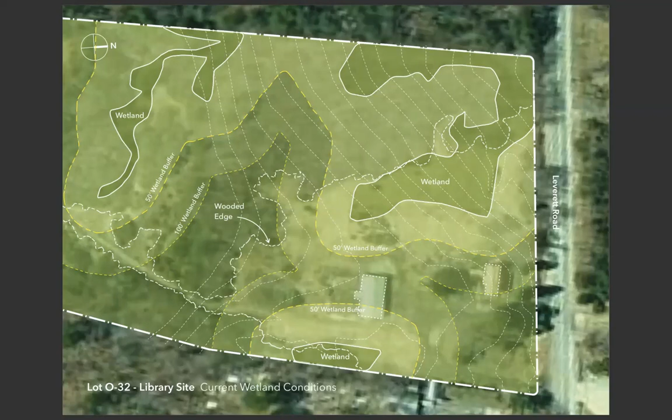What this leads us to is the expectation that really the best area for development of the new library is in this spot that's between the 100-foot buffers, certainly well out of the 50-foot buffers, with access then from Leverett Road coming in through here, which is roughly where the current entry from the driveway is now, off Leverett, and then coming straight back, threading between the 50-foot wetland buffers back to the building and parking.

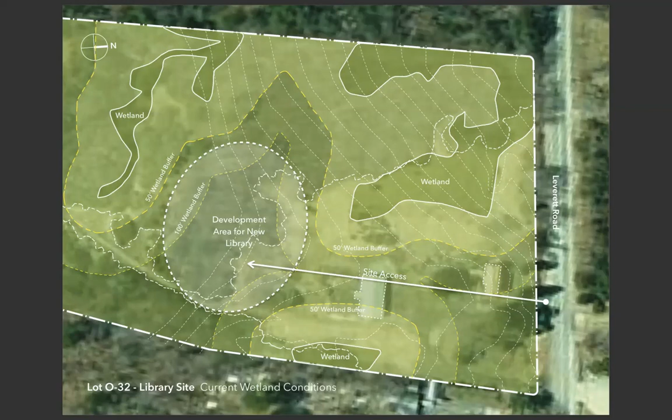Directly relevant, I think, to this project are two recent projects that we've done that I just wanted to talk a little bit about. This is a recent project completed in 2021 in the town of Norwell. Norwell as a town is about 50% wetlands. This is a much bigger building. It's a public library, 20,000 square feet on a single level, completely surrounded by wetlands.

A lot of the same ideas about stormwater management, how we deal with runoff, both from parking and driveway, but also from the building, were things that we really had to work hard at to figure out how to solve in a context like this where it's surrounded by wetlands. And that will be true of this project as well. And so really this is to say that we have that experience. This was a very successful project and a real collaboration with the local ConCom. It turned out quite nicely.

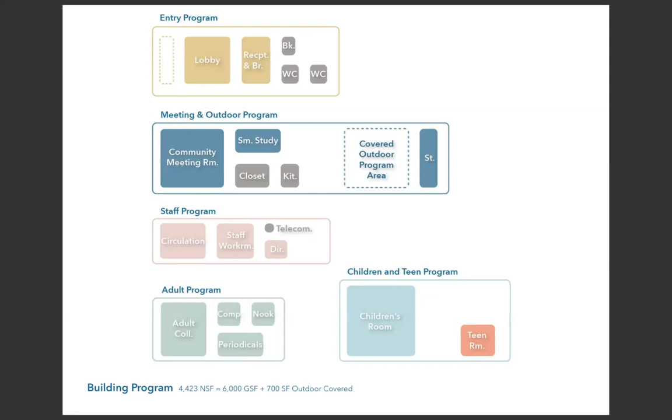So to talk about your project, this is a graphic summary of the building program. I know it's difficult to read these titles, but at the start of a project, it's helpful for us to take a written program and translate that into a visual diagram so that we can use that to start moving pieces around on paper and thinking about adjacencies between certain groups of programming. We've grouped this into entry program, lobby, reception, community meeting room, a study room, spaces that support the meeting room, outdoor covered space, staff spaces, adult program, and children and teen program. And then we use that to start to develop some building planning diagrams.

So we'll have septic, we'll have well water. This will have to be a fully sprinklered building just by code. And so we'll also have to have underground water storage tanks to provide enough water capacity for the fire protection system.

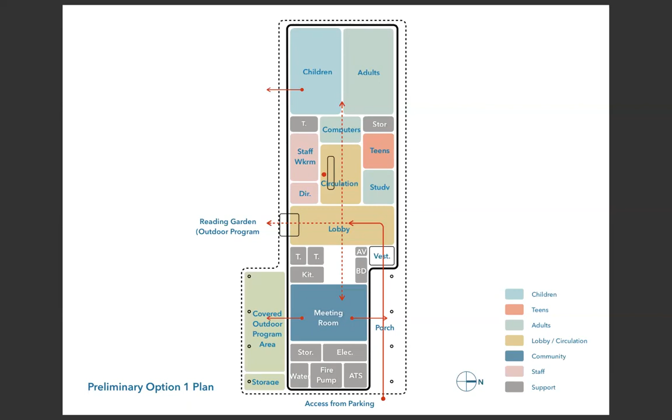So this now is a diagram of the floor plan. The graphic program that you saw earlier, we've sort of rearranged those pieces into a plan that organizes it into a fairly simple bar building with a covered porch at the entrance. And I'll just get right into the plan.

But before I do, one of the things that we looked at in all of these buildings is the roof. We were thinking initially gable roof versus single slope roof, and we realized pretty quickly that the single slope roof offers a number of advantages. Number one, you can see here that only half of a gable roof that's facing south has roof area available for solar, whereas with a single slope roof, 100% of that roof area is available for solar, which translates to about a 33% increase in area. It's not double the area of this side of the roof, but you can cover 100% of that roof with solar. So for that reason, we think there's a real advantage to having the entire roof oriented south.

Another benefit is that when we think about rainwater with a gable roof, we're sending half of that rainwater to one side of the building and half to the other side. If you remember the orientation of the building, half of that rainwater is going into the wetland, half of it is going behind the library. If we do the single pitch roof, like you saw in those previous two examples I showed you, we can collect 100% of the roof runoff away from the wetland buffers in an area where it's easier to treat and send back out into the site.

So in terms of building planning, I know it may be a little bit difficult for some of you to read the labels, so I'll try to walk you through this. From parking, you come in underneath a covered exterior porch, which is along this lower right-hand side, into a vestibule and lobby. If you continue straight, there's the circulation desk, computers, and that's flanked by staff space on the left, director's office, staff workroom, storage, and then library user space on the right, a study room, teen room, and a restroom that is for family, but also staff. Adult and children collection areas are at the end of the building.

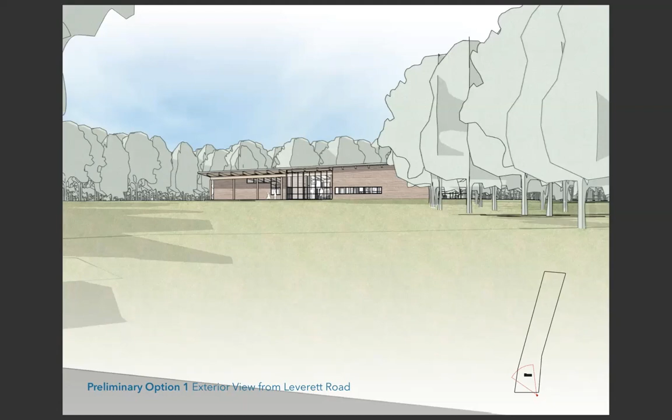This is a view then from Leverett Road, which you can see here, looking towards the front porch. This is the entry vestibule and lobby. The adult and children collection rooms are down at the far end. Meeting room is at this end. You can't see it from this view, but there would be direct access to the back to a covered outdoor program space on the back side.

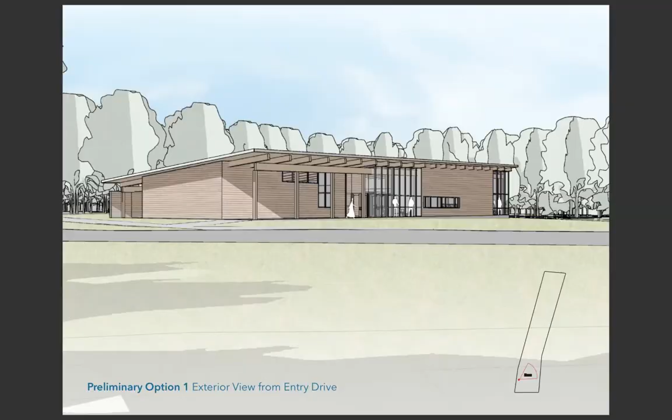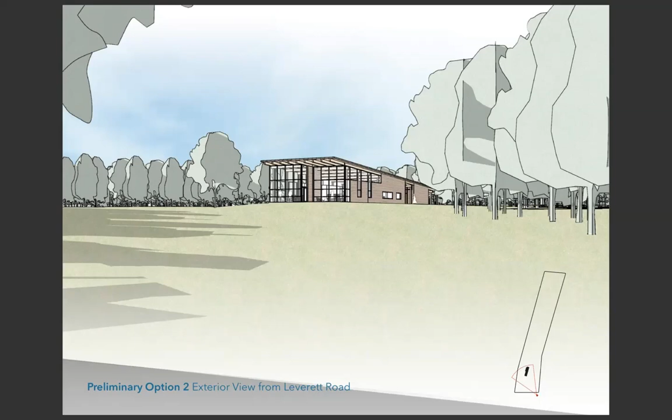And then this is a view again from that same northwest corner of Leverett Road. You can see the roof sloping from high at the north down to lower at the south. The main reading rooms facing the meadow in front and Leverett Road. This is the lobby here and the covered outdoor program area here.

And then a view from the entry drive. This is the entry porch into the lobby. Some of the smaller rooms in the middle with attic space above, and then the larger reading rooms at the end, meeting room and covered outdoor space down at this end.

And then the third scheme that we looked at was a bent bar, an L-shaped scheme. The nice thing about this is that it starts to kind of define outdoor space. It shields that space somewhat from parking, although not quite as well as the previous scheme did. That was a nice thing about the previous option, that the building really creates a strong separation between parking on one side and then the landscape on the opposite side.

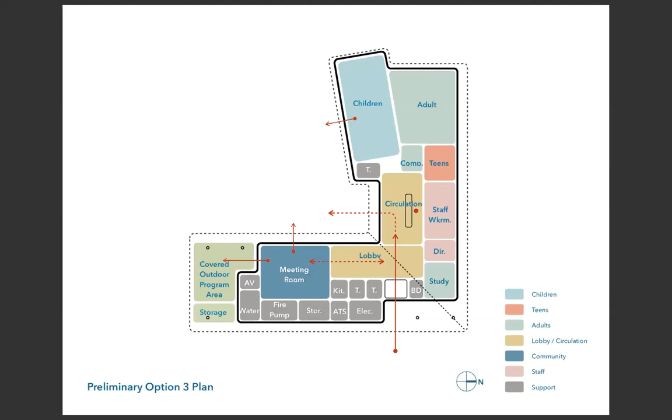In this one, you enter into a corner porch, straight into a lobby with circulation, moving through into children and adult spaces. To the left, you have meeting room and covered outdoor space, staff space behind the circulation desk. There's a study room in the corner and teens adjacent to adults.

Like the previous schemes, this has an area that is available off hours. In this case, the study room also falls within that area, so could double as a small meeting space off hours in addition to the larger 50-seat meeting space.

Why is that missing? Hang on. Apologies, I don't know why that image isn't showing up. Well, doesn't seem to be there, but we have this one.

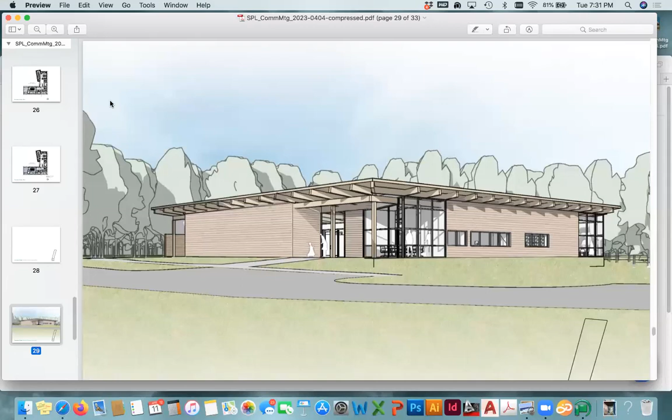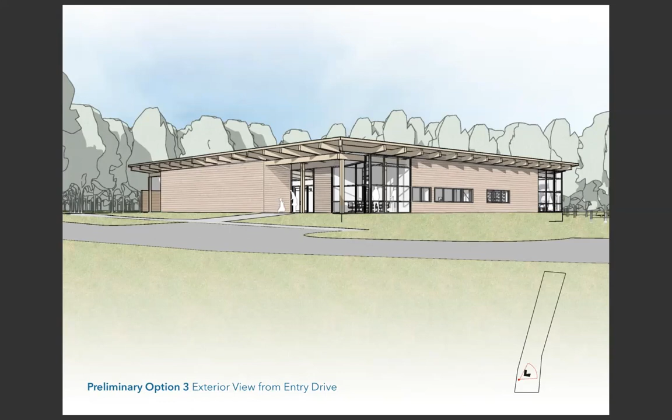So this is a view of that L-shaped scheme from the entry drive with a covered porch, entry lobby, smaller program spaces, adult reading room down at this end, a covered outdoor space from the meeting room is down at the opposite end.

In terms of square footage, we have two numbers here, the net square footage and gross square footage. Net square footage is all of the program that is directly contributing to the library functions. So reading rooms, offices, study rooms, et cetera. The gross square footage number includes other things like circulation space, storage rooms, bathrooms. So gross square footage is always higher than net square footage.

But if we compare these three projects, and again, this is schematic design, so we have a long way to go in terms of fine tuning the design. But if we look at the gross square footage, they're all in the kind of 6,000 square foot range. 6,000 square feet is our target for the gross square footage.

They are all, again, fairly close in net square footage. They're all a little bit bigger than the program. So in all cases, we're working to tighten up the numbers. But generally speaking, relative to each other, they're roughly equal for our purposes at this level of schematic design.

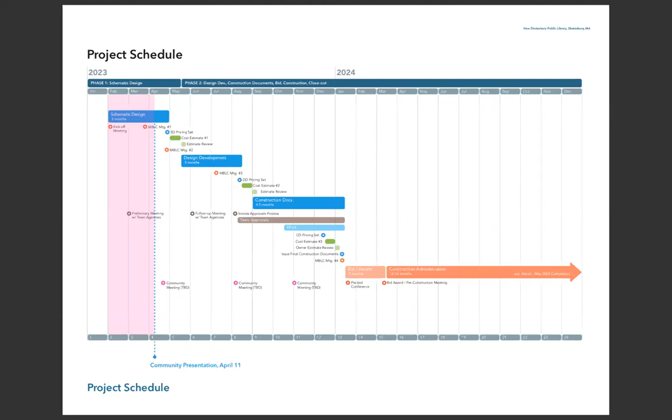Wheezy Hole, West Pelham Road. I guess it's loud enough. Could you go back to that last slide that had all 3 designs on them, please? So we're having a sidebar conversation over here, and we're wondering if design 1 and design 3 have a similar window end look as number 2. We don't see it on those 2 other views. So is there the same amount of windows on the children's end and the adult as that one?

There is, and again, I know it's early, but yes, the 3 schemes are roughly equivalent in size, in sort of expression, glazing versus solid wall, et cetera. So yeah, the end of option 1 and this end of option 3 would be similar in terms of glazing to the end of option 2.

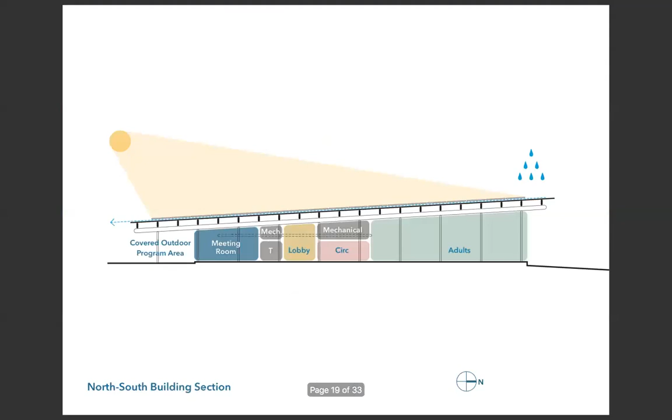So you enter from a lower porch into a taller space. So there's a little bit of drama here, then into a lower ceiling space, and then emerge out again into a taller space. So there's variety throughout the building. Smaller rooms have a smaller feeling. They have a more intimate scale. The larger rooms have more volume to them.

Question from Linda Seidman. What will be the noise protection between children room and adult room? Do they have to be next to each other? We have talked about this in the building committee meetings, and we do think that they need to be next to each other for a variety of reasons. In terms of noise separation, we've also talked about that, and we've gone back and forth about the merits of an enclosed children's room versus an open one. And I think the general preference is that it be open and have the flow from one to the other be as fluid and easy as possible.

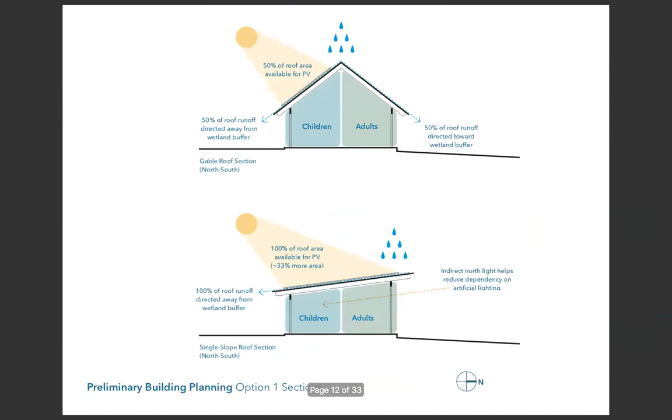While you're going back to Norwell, I'm going to ask 2 or 3 questions from Amanda Alex. Why are these buildings so tall? Assume they are 1 story. They are all 1 story, single story slab on grade.

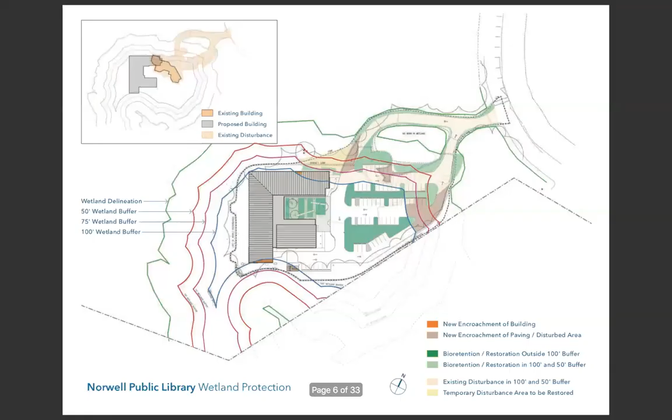Could you please go to the microphone, please? Could you go to the microphone, please, so that the people on the webinar can hear you?

There's a patio, there's seating, there will be a shade tree as that matures. And the spaces are organized around it, so you can access it easily. You're always referencing it visually. It's a nice space to look at year round. This also has some thoughtful connections down. This is a different type of site. It's a hilly site, so this has a lower level that has access out directly to grade.

Children, in this case, are located at the lower level, so they have direct access out to outdoor children's space for outdoor programming, story time, activities, etc. And we wanted to make sure that people had a way to get to those spaces as well. So there's a path that takes you down around to the pond side of the building. So I think that is, to Weesley's point, the kind of thought that will go into this project as well in terms of what's happening around all 4 sides.

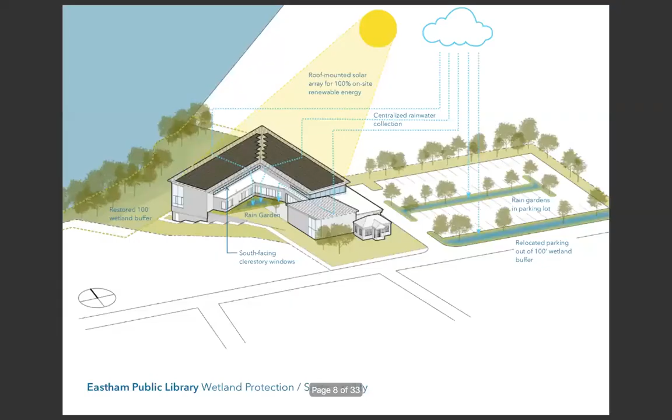And then unit pavers that are pervious, like precast paver systems, tend to be quite expensive. So what we think is probably the most cost-effective solution is to use asphalt. It's easy to maintain. You can plow it, but make sure that we're managing stormwater runoff from parking as efficiently as possible. And if I go back to a site plan for a minute, so you can see here, we're providing a loop turnaround for emergency vehicles and actually for patron use as well.

This whole area here we're imagining is a bioretention area, so rain garden, heavily vegetated, kind of constructed wetland. So all of the runoff from parking and from the surrounding driveway would be sloped to go into that space, and that provides enough storage capacity for those plants to filter that water before it is released back out into the groundwater. Along the driveway, we will have to have a kind of longer vegetated swale that effectively does the same thing. But we think that the most cost-effective thing is going to be asphalt. It's easy to maintain, it's a lower cost, and then manage stormwater as well as we can.

So I just wanted to remind you Bostonians something. My daughter just moved out east, and it was quite shocking to see that they got 0 inches of snow when we got 2 feet. Yeah. And point taken about the slope, we still have snow in our yard across the street. So yeah, I kind of agree. Make sure we got

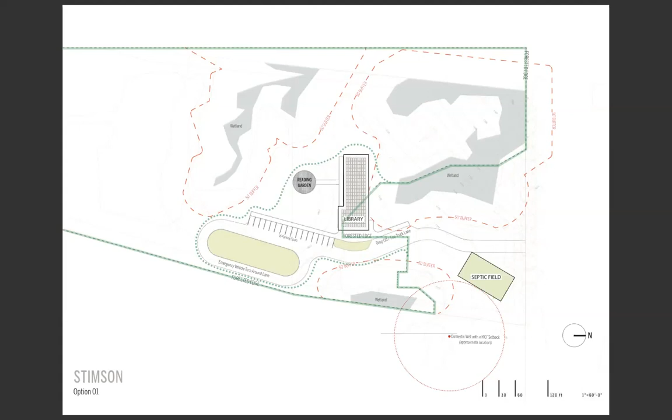I have kind of a related question. Hi, AJ Cashew, 35 Hidden Meadow Road. I'm wondering if you might be able to just give a high level summary, just speak to some of the trade-offs between these 3 designs. I'm sort of hearing about this for the first time and seeing this level of detail. It's a little bit difficult for me to really differentiate. The things they share in common seem to be numerous, and it's making it a little hard for me to differentiate some of those trade-off decisions that were made.

So let's start with building program. They all accommodate the same building program. So I would say they're equal in that regard. But there are nuances to that. So we talked about sight lines earlier. So the sight lines in options 1 and 2, in terms of visual oversight by a small staff, are better than the sight lines in option 3. The sight lines in option 3 are not terrible, but the other 2 are better.

I think similarly, the site plans are all fairly similar, right? The parking is handled the same way, the driveway, septic, but the building orientation changes. And I think there are things that distinguish each of them in that regard. So option 1, as you can see from the images on the left, presents a long face to Leverett Road, and it creates a very clear distinction between what's in front of the building and what's happening behind the building. It doesn't do as good a job as option 2, for instance, of creating that separation between parking and

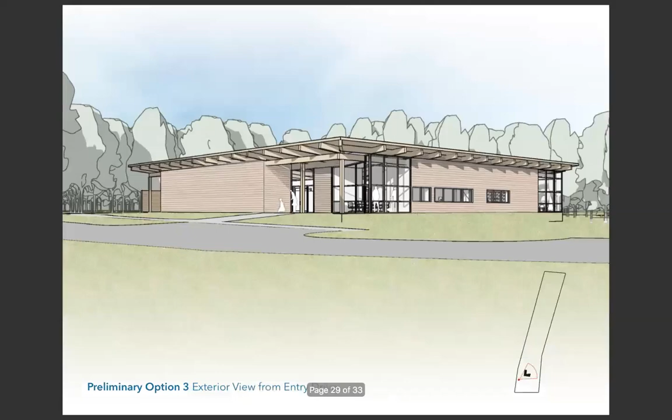Another email question was, did we address the expandability of the meeting room in case of overflow crowd for certain meetings? So we have talked about that, and that is a challenging aspect of the design. And I would say that these 3 schemes achieve some level of that to varying degrees. Option 1, I don't know if you guys can read this. Maybe I'll back up to the individual plans. So starting with option 1,

there's a lot of stuff in option 1 between the meeting room and the lobby, and that's stuff that we need there. Bathrooms, a kitchen that serves the meeting room, the book drop, which has to be close to the entrance. We have an AV storage room, which supports the meeting room. Some of those things, the bathrooms really can't move. They need to stay central and accessible to the main public space. The kitchen, the AV room, theoretically could move further down into this block, which would reduce the depth, but we're always going to have some program between the lobby and the meeting room.

And so, although this is wide, this is about a 12-foot wide space between the meeting room and the lobby, and we could look at different ways of managing those doors. There is some ability to spill out from the back of the meeting room into adjacent space, but it's not like the whole back of the meeting room opens into the lobby.

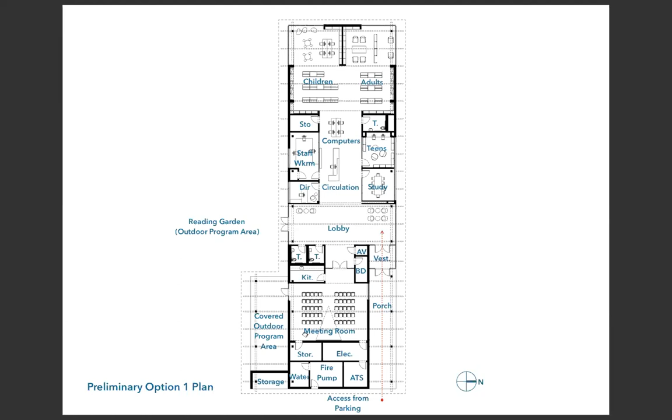If we look at option 2, by comparison, similar, we still have the bathrooms adjacent to the lobby. Again, we've got a space that is, in this case, I think in that kind of 10 to 12 foot range. Here we were showing no doors or a sliding barn door that could close that off, thinking that most of the time this room is going to be open and available for people to use, for study, for quiet reading, for group activities, et cetera. And so there's an easy connection between the lobby and the meeting room, and this is a shallower depth between the two. So it's a little bit less of an impediment.

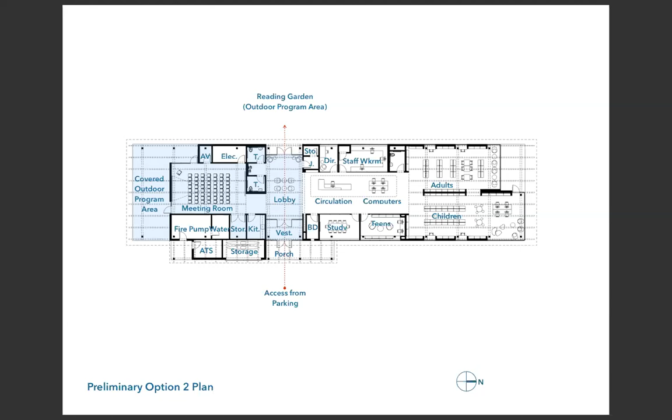In option 3, we have probably the best relationship between lobby and meeting room, although in this one, the orientation of the meeting room is different, with the presentation wall being on the long side, because of, in this scheme, an interest in trying to make this glass with doors. And again, that could be handled a number of ways, but there's obviously a strong visual connection and potentially a strong physical connection, although it's kind of out the side of the room instead of the back of the room, in order to create some continuity from lobby to meeting room to covered outdoor program area.

It doesn't make as much sense to have the presentation wall on this end. And so you're entering the side of the room. So it's a little more awkward, I think, than the other two. But they all recognize that that's a goal, and we're trying to figure out ways to accommodate that the best we can.

Are there any more questions? Since someone here asked if we're going to take a straw poll, I think we will be taking a straw poll. We'll give you a few minutes to think about it. For those of you who are on the webinar, you can send your email straw poll to livebuild@shutesbury.org, and we will count you.

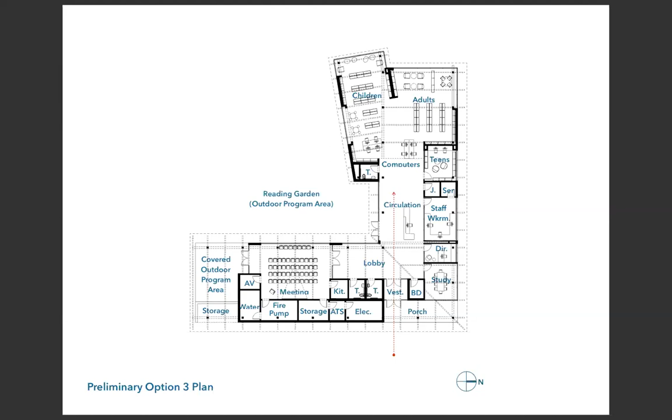So take a few minutes, think about it, stretch, stand up, say hello to your neighbors. We'll turn the lights on so you don't fall asleep. And we'll give you a few minutes and we'll take a straw poll. Excuse me? Matt, could you please put the slide up that has the 3 comparisons? Thank you.

I found Chris back there. I told him. Hello.

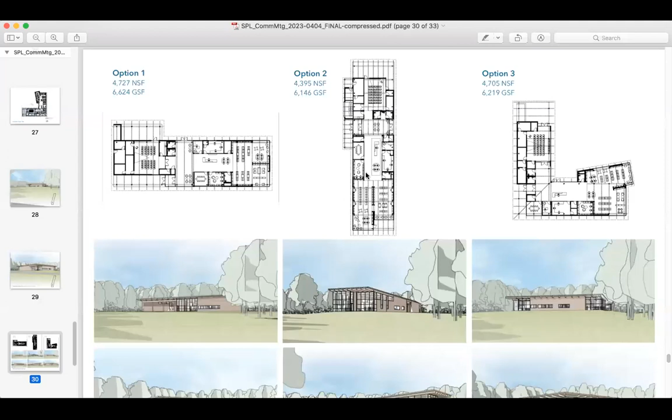So if you're on the webinar, please bring your votes to the email. I have a number of them already, but this is your last chance. I'll give you two more minutes. Thank you. Matt, you're standing in front of it.

All right, folks. Our architects have a long drive back to Boston, so let's all sit down, make up your mind, and we're going to do a hand-raising vote, okay? Excuse me? Of course you can vote. You're part of the community.

So, everyone who is in favor of option 1, please raise your hand. Wow. Okay, wait a minute. I'm looking to make sure there are no votes for option 1, whether it be on the webinar or in person. Option 2, please. Somebody else count. I'm counting the votes here. Are we raising our hands too?